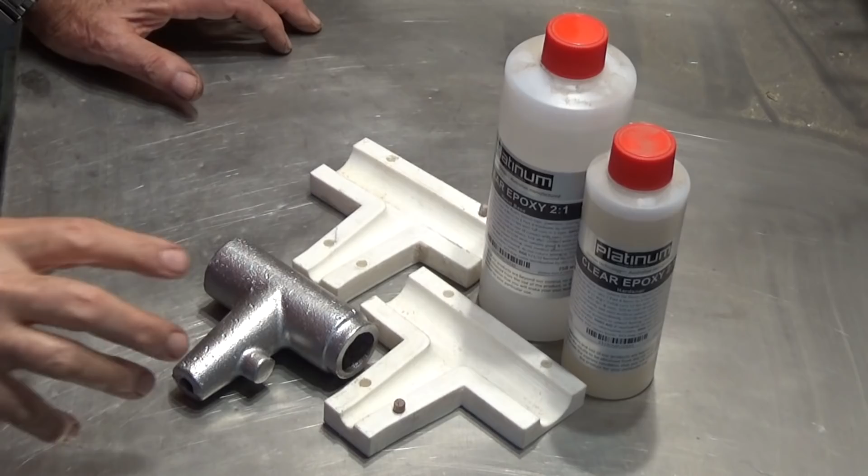G'day, it's Prezzo here, back in the shop, and today's video is about making a metering valve for a home shop blasting cabinet. You've probably seen lots of videos about the Harbor Freight Sandblaster or Media Blaster, and you've probably looked at all of the upgrades that they recommend you do after you buy one of these things. And it's a bit of an indictment on the manufacturer, really, that no sooner do you buy it than you need to do a whole bunch of remedial work to actually make it operate effectively.

Now, the one that I bought, I went through and did most of the upgrades. I improved the lighting, I sealed the lower section of the cabinet. What else did I do? I put a liner on the inside of the door so the media wouldn't fill up the little holes in the pockets in the door. I made a trolley or caster base so we can wheel it around the shop.

And to me, the most important upgrade was to make sure that I could get a continuous flow of, and I'm going to use garnet, but I need to get a continuous flow of garnet to the gun. Now, the device that they supply with the blast cabinet, you might as well throw it in the bin as soon as you get it. It's not effective, it doesn't work.

Now, there is an upgrade that you can purchase which includes a foot pedal and a thing called a metering valve. Now, I considered buying one of these, but unfortunately when you live in Australia, US manufacturers don't really want to ship to Australia. The cost, we pay 30% just on the value of our dollar for whatever it's worth, and then you've got the shipping charges and tax and everything else, and it just becomes impossible.

So what I considered doing was replicating the operation of this metering valve based on what I understand it's supposed to do. And essentially what you want to do is to take the media from the hopper, take it through a right angle bend here, and then at this point here we're going to add air to the mixture. And what that does is it fluidizes the flow of media so it will pass through the clear plastic tube to the actual blast gun more freely.

Now, in my last video I made this casting and I did it using a 3D printed core box, and I used an epoxy resin and sand mixture to make the core, and that was a resounding success. I ended up with a casting that's hollow all the way through, plus a tapered section inside here. So what I'm going to do today is to do all the machining on this and see if we can get it working. But before we do that, let's have a look at a diagram which I hope will explain how these metering valves operate.

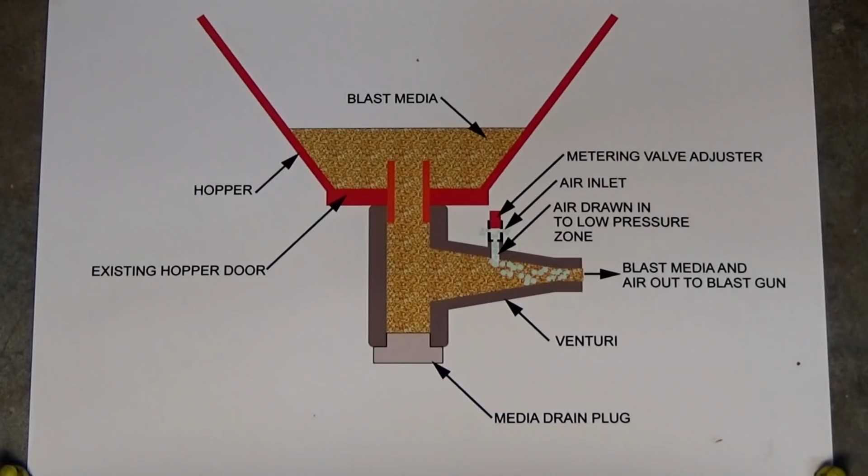Okay, well I could have done some fancy CGI animation, but I thought, hey, what the hell, let's do it old school. So this is a diagram which I hope explains how this metering valve works. Now, if you've got one of these Harbor Freight blast cabinets or a Hare and Forbes one, they're the same, you'll know that this is the bottom of the hopper. There's a flap at the bottom here which can be opened to drain the media out.

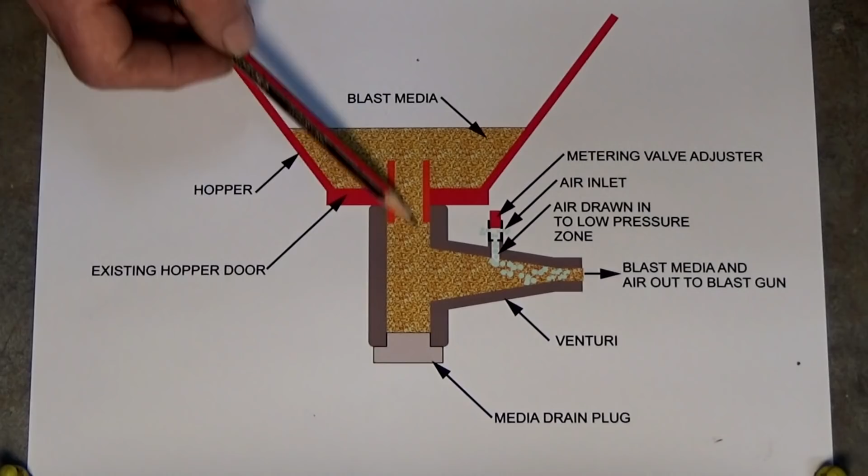Now, the modification that I've seen in kit form, and the one that I'm trying to replicate here, allows you to drill a hole in the bottom of that flap there, put a coupling in place, and this aluminium casting, which you've already seen, has a path going straight through and blocked off by a cap at this end. You can undo the cap and drain the media out of the hopper if you need to.

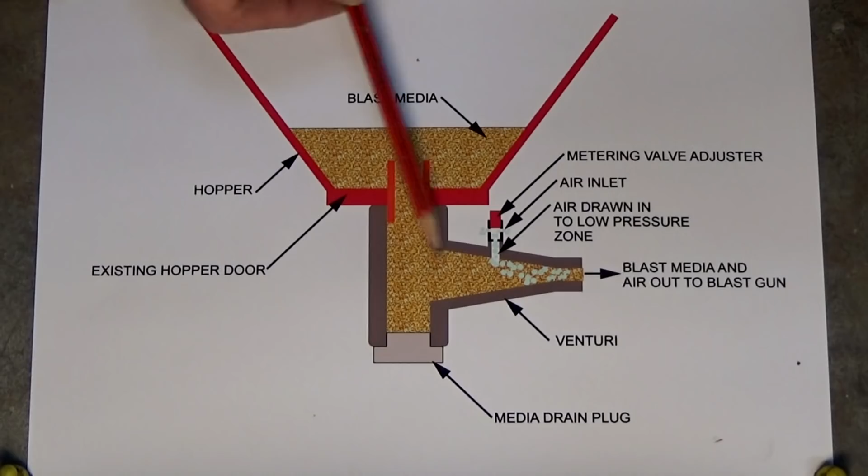Now, this section here, this tapered section, diverts the flow of the blast media to a coupling at this end, which is connected to a clear plastic tube. And it's tapered. Now, I'm guessing that the reason we're having this taper here is to create a venturi effect. Now, the sand itself, if it's not doing anything, if it's just sitting there, it's like a solid.

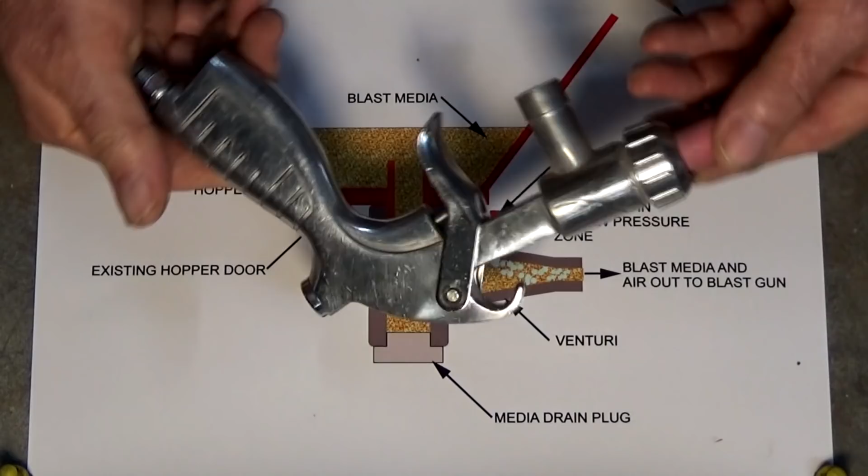But when it's starting to be drawn along by the vacuum created by this gun, it becomes like a fluid. Now, as any fluid passes through a venturi, its velocity increases. When the velocity increases, the pressure drops. Now, the pressure drop allows air to be drawn through this variable metering valve, and the air then mixes with the flow of the blast media. I'll call it sand because it's easier.

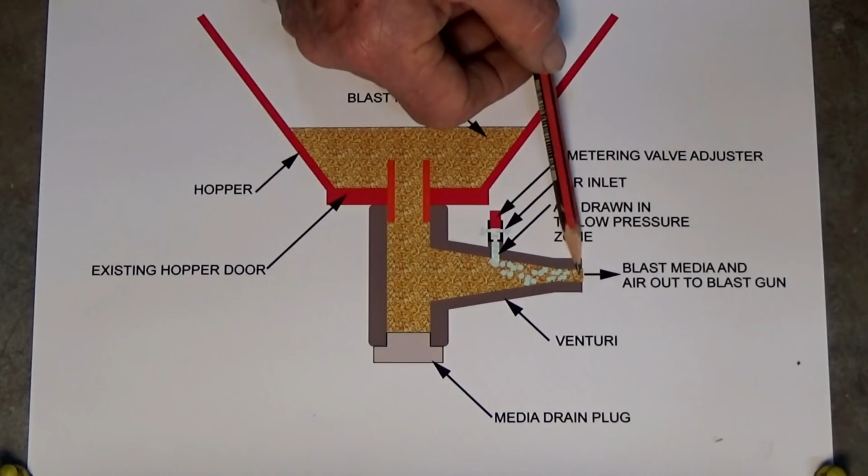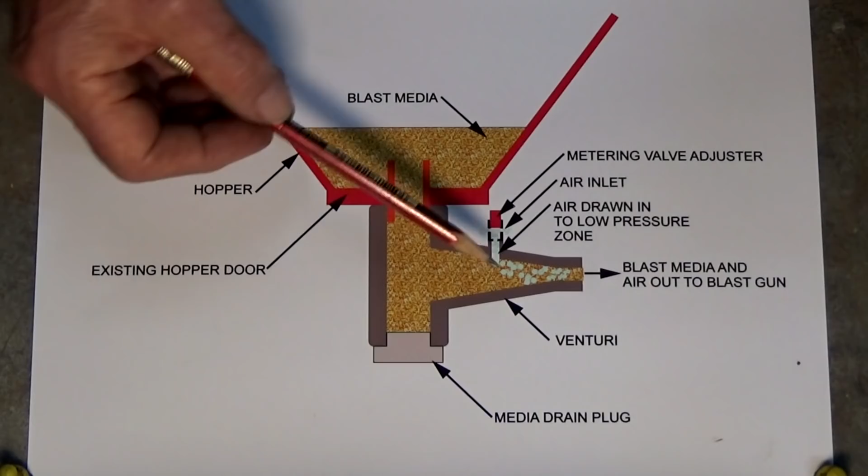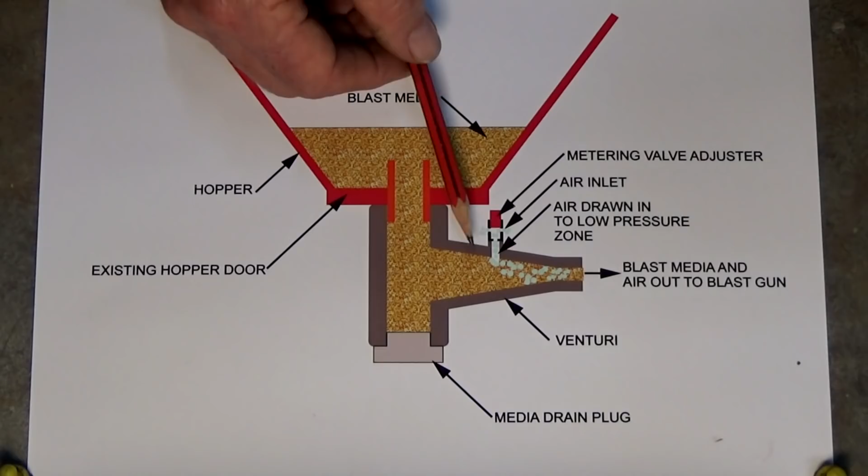So now we have a mixture of sand and air passing through the venturi, and because that has a lower density, it's mixed with air, the theory is it's easier to be drawn up by the hose and into the blast gun itself. Now, all of this is based purely on speculation and my very, very limited knowledge of fluid dynamics, and also from me studying a few fairly low resolution images. Now, if I've got it wrong, feel free to shoot me down in the comments section, but that's my take on what's happening here.

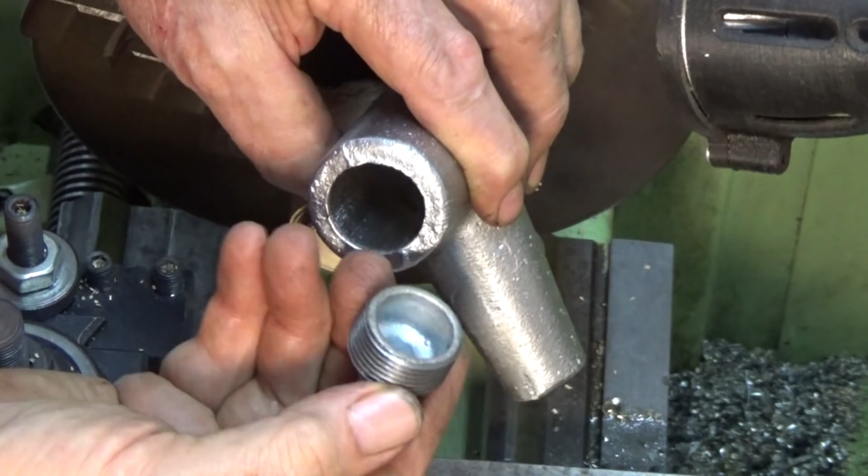So I'm going to go ahead and make this and fit it to the cabinet and see if it works. One of the first things I have to do here is to make a plug to go in this end here. This will be where the media is drained out if you want to change over what's inside the sandblaster. Now, I went down to the hardware store and I bought one of these little threaded plugs thinking that would be ideal. Turns out that this is 24.5 millimeters diameter. The drill size for this is not going to work, so that's scrap. So I'll need to make a plug from scratch.

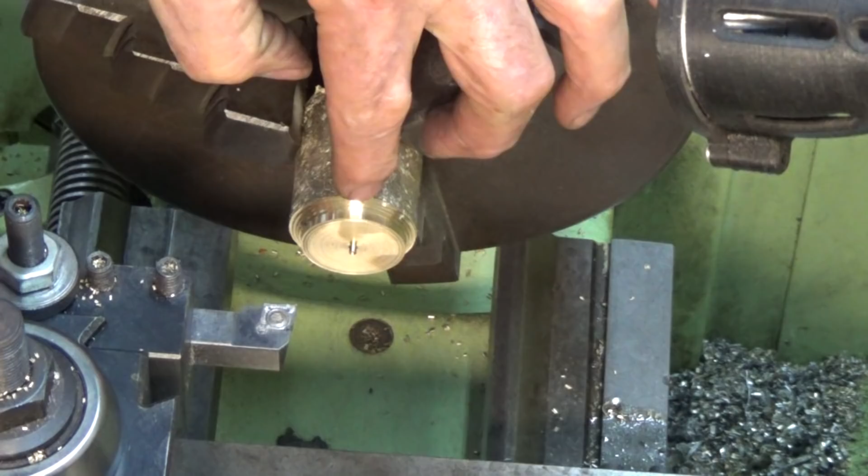Now I've got some brass here which was left over from a casting job that I did, and surprisingly this machines beautifully. So we're going to cut a thread, a male thread on this. It's going to be 1-1/8" UNC. I think it's 7 threads per inch. I don't work in imperial, so I've got to write all this stuff down. So it's 1-1/8" UNC, 7 TPI, needs a 25 diameter drill size, which is going to be ideal for here. That's 24.5, so I'll just be able to clean that up and cut a thread in there. So we'll do this section first, and I'm going to make a Tommy bar through here so it's easy to grip and undo that.

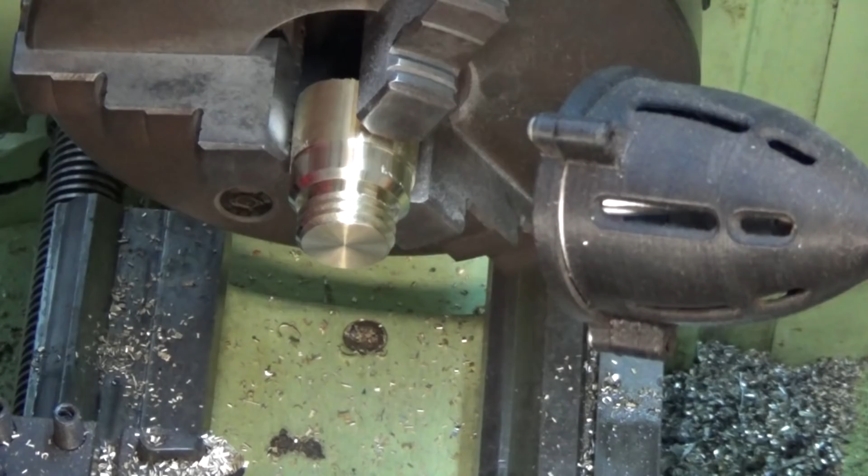Alright, so what did I say? 7 TPI. That'll be alright. I'm going to change over my driver gear. I just barely see that scratch, so I'm just going to check that. Okay, I think I just did all of that threading and forgot to turn the camera on. But there it is there. That was a 7 TPI thread.

The reason I did such a coarse thread was that when you unload the funnel or the hopper inside the blast cabinet, all the media is going to come out through this thread section. And if you've got a really fine thread and you try and put the plug back in there, it's likely that it's going to get jammed up and score the thread. So at least with this big coarse thread we can sort of blow it out a bit and get it cleaned out fairly easily. Now I've just re-chamfered the 2 corners there, and I'll put this back in the chuck later and I'll drill a cross hole for a Tommy bar.

I want to get the female thread cut in the aluminium casting and make sure that's all good before I go much further. So that's where my threaded plug needs to go, and the challenge now is to get this cleaned up on the end here and then cut the internal thread, and that's going to mean cutting a thread clearance inside. So I'm just going to get this cleaned up here. That's running out a bit more than I'd like, really. Let me see if I can get this running a bit more true. Okay, so what we need to do now is get that bore out to 25.

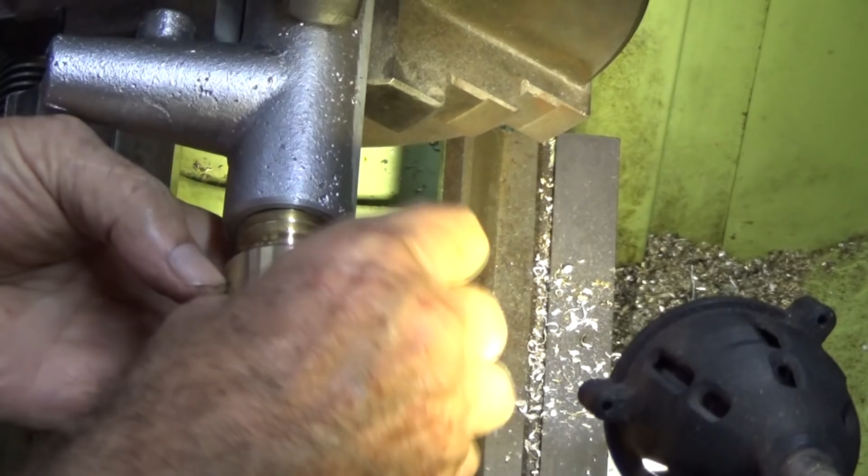I'm not having a good day, and my memory card filled up, so I missed the critical moment where I was about to show you how good this thread is. But I finished off using some cutting fluid just to give me a better finish on the internal thread, and you might say that's a bit wobbly, but I want to have some clearance there. I'm going to have a rubber washer for this to seal against, and that screws in there. Because it's such a coarse thread, I'm not bothered that it's a little bit wobbly to start with. It's going to make it easy to get in. And remember, this is going to fill up with grit, so that's okay.

So what we're going to do now is flip this around. We're going to cut a thread on the other end, and that will be the one that secures against the door in the bottom of the hopper. This is the end that's going to fit into the bottom of the hopper door.

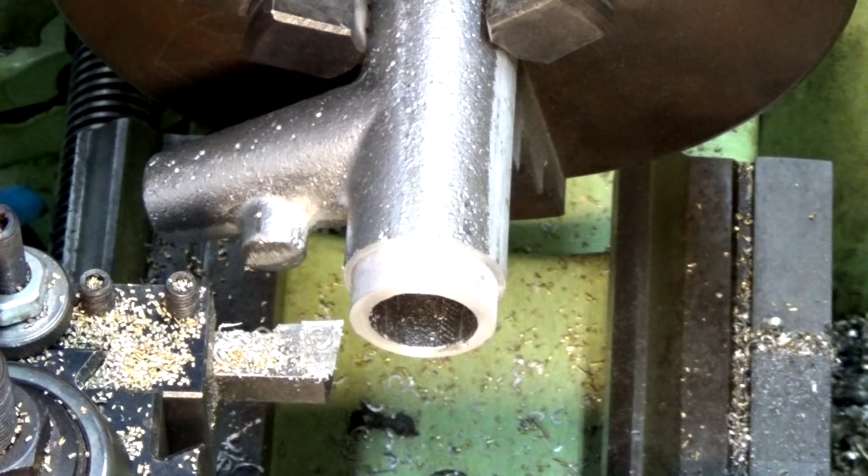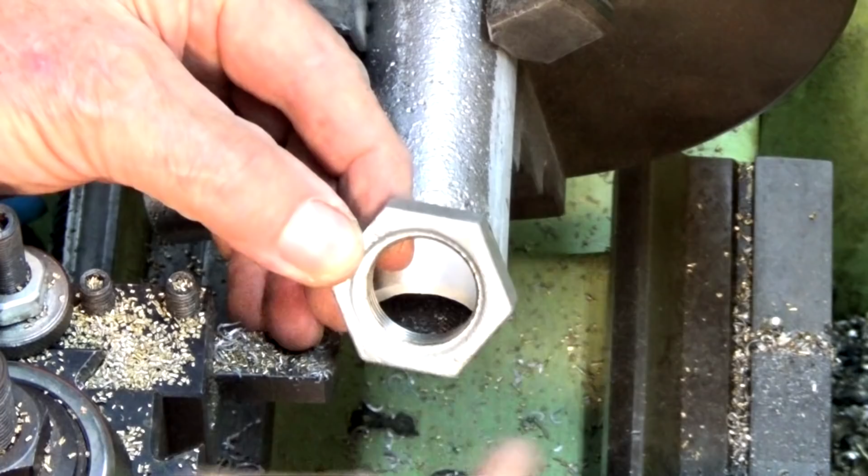So I need to cut a thread on this, and even though I normally work in metric for my North American friends, I'm going to make an exception. So I'm going to cut a 1.25 inch UNF thread, 12 TPI, and I've discovered that I can just get that same thread inside this hex nut, but I'll need to bore it out and re-thread that. So this is a one-time only thread. It's going to be done up tight on the bottom of the hopper door, and it's not going to move again after that, so I'm not too bothered about this being a finer thread.

Just to save time, I already partly machined this just to get it cleaned up. So 2.22 millimeters, or 87 thou, off that.

Right, so I'm going to put some thread relief there.

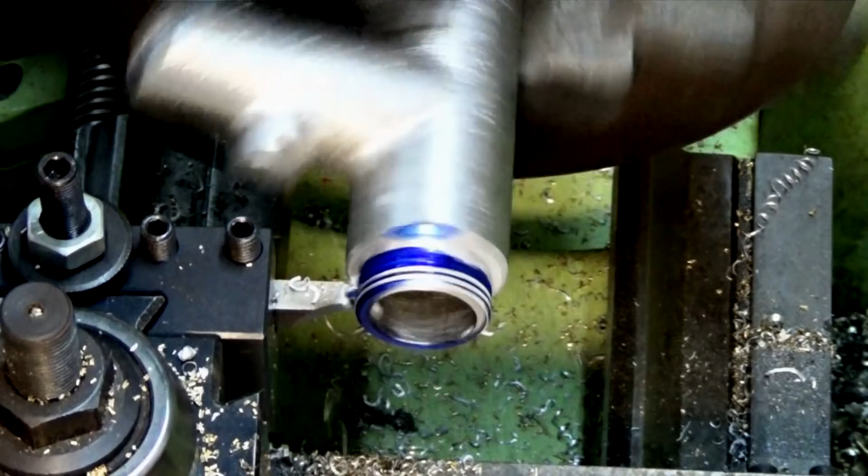Nearly there. I don't know if you noticed, but I didn't withdraw the tool enough when I brought it back. I left a little scratch mark on the way back. Sign of a rank amateur.

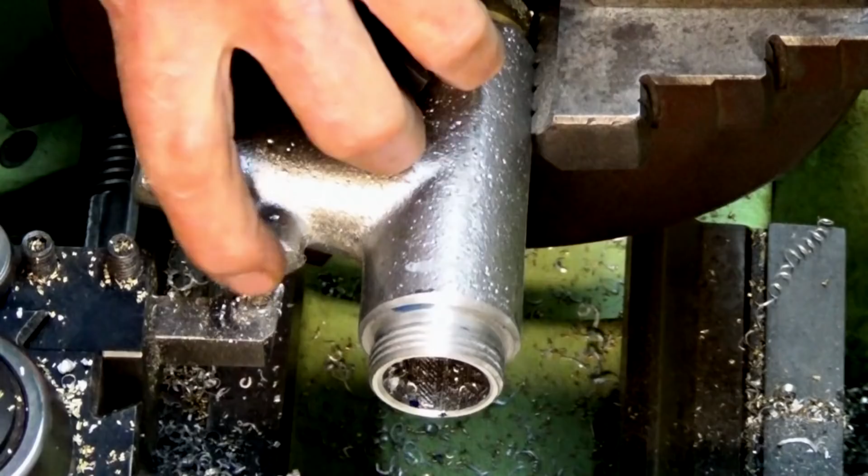That's about as far as I want to take that. So I'm going to machine this boss here now, and when you're doing a setup like this, I always like to turn the spindle over by hand just to double check you're not going to have anything clash and break or smash. I don't know how many times I've turned a lathe on with an odd setup like this and overlooked something, like maybe the compound slide's extending too far underneath the part. You just don't expect it to clash, and it does. So I'm going to give this a light cut now.

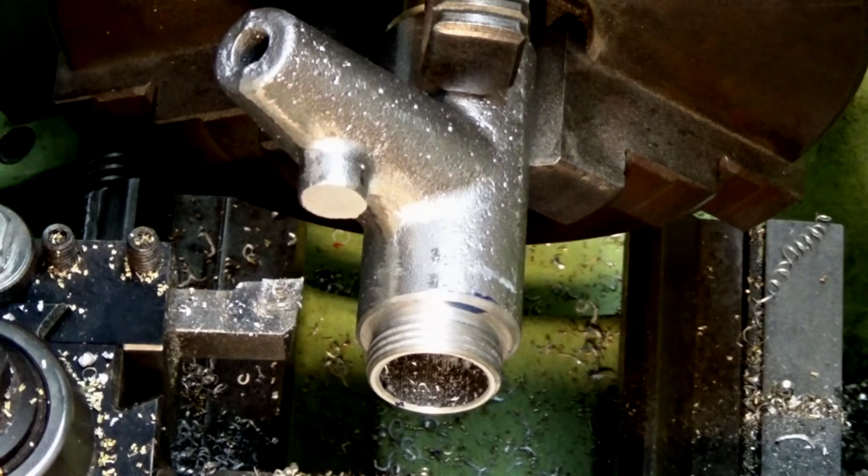Let's mostly clean that up. Let's give it one more pass.

Alright, so I can drill this in the lathe, and it's just convenient for me to do it that way. So I'll get this laid out, just find a rough center. I suppose the good thing about this is none of these dimensions are really critical. I mean, the threads are, but other dimensions we can get away with a little bit of error. It's not a problem.

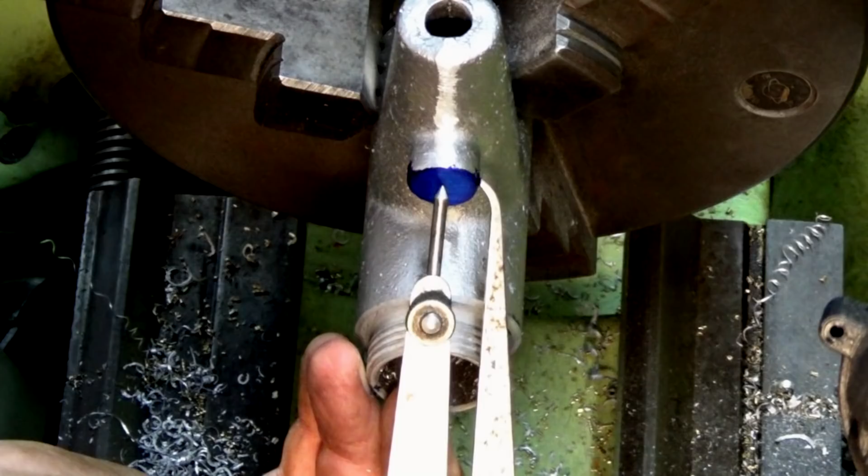Pretty hard to see there, but what you end up doing with a pair of these Jenny calipers is you estimate the center, scribe a line from one edge, flip it over, scribe it again, and if there's an error you just split the difference and that gives you the center. So I'm fairly confident I got that right.

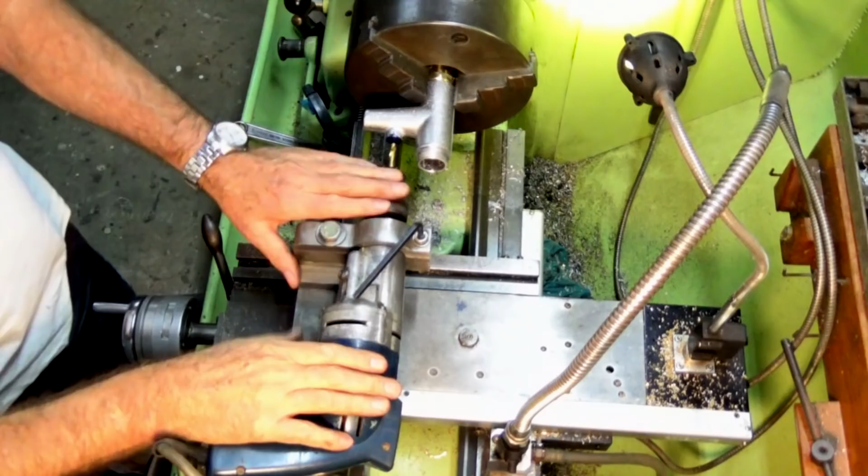So we're going to set up now my drilling jig and we'll drill that through. This is my rig for doing this drilling operation.

This is a really old AEG 2-speed drill with a metal gearbox, and I've seen some devices being used by home machinists that generally rely on a cordless drill with a spindle bearing through here. If you can get one of these old drills, they're rugged and robust and rigid because they have the metal gearbox, and this is just a split clamp which has been machined out at the same height as my lathe spindle, and it just clamps down with a single Allen screw there.

So let's go ahead and get this spot drilled and then we'll open it up. I'm going to put a 10mm metric thread in there. I know, mixing imperial and metric threads, I'm a rebel.

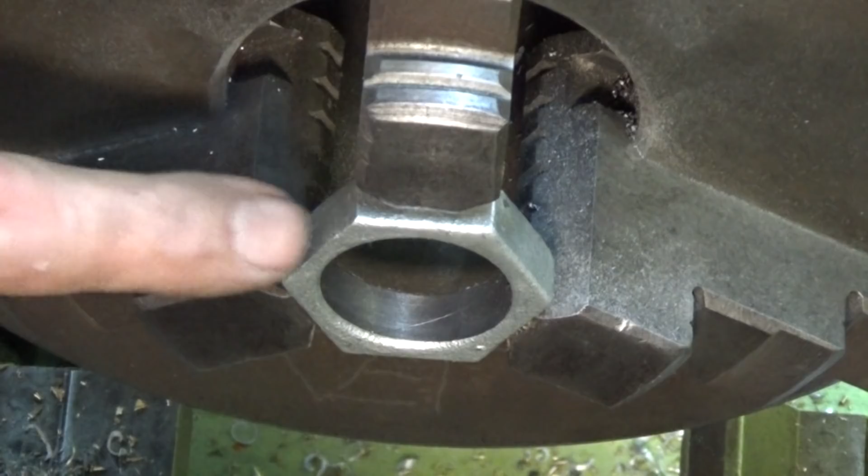Okay, that's close enough. That's going to be my 1¼ UNF nut, and we're going to cut a 12 TPI thread on the inside of that.

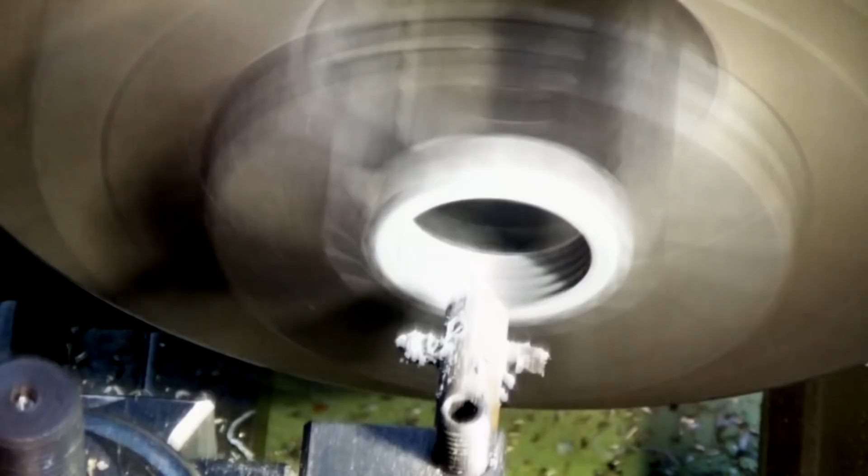That's a long way off being done, but I always second guess myself.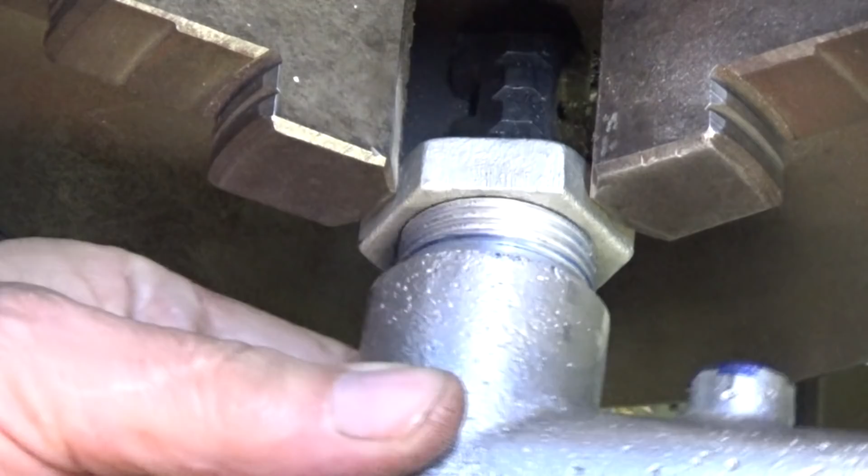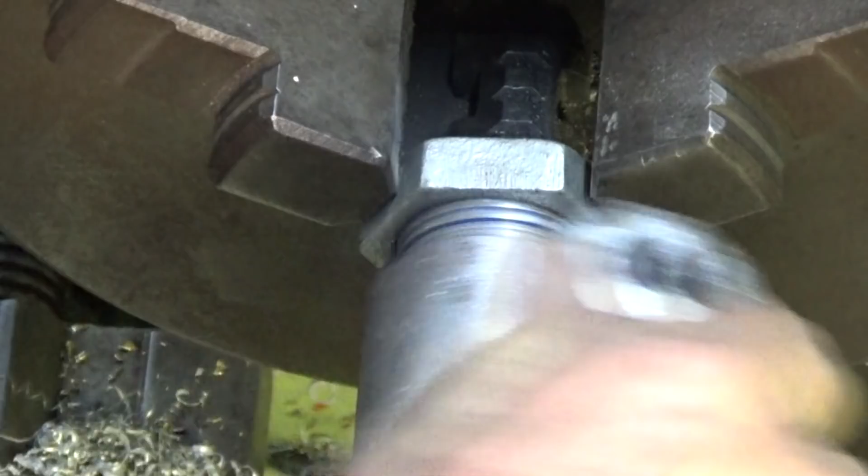Oh, look at that. That sloppy mark, come on. Ah, it'll work. Good thing I checked that, eh?

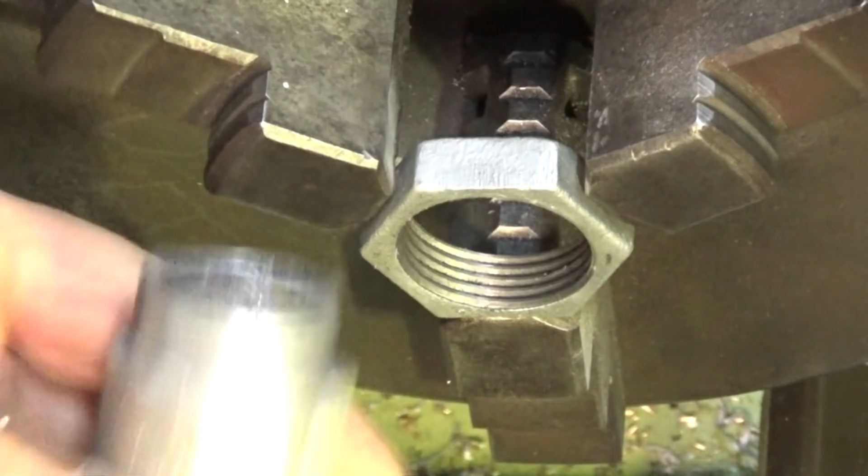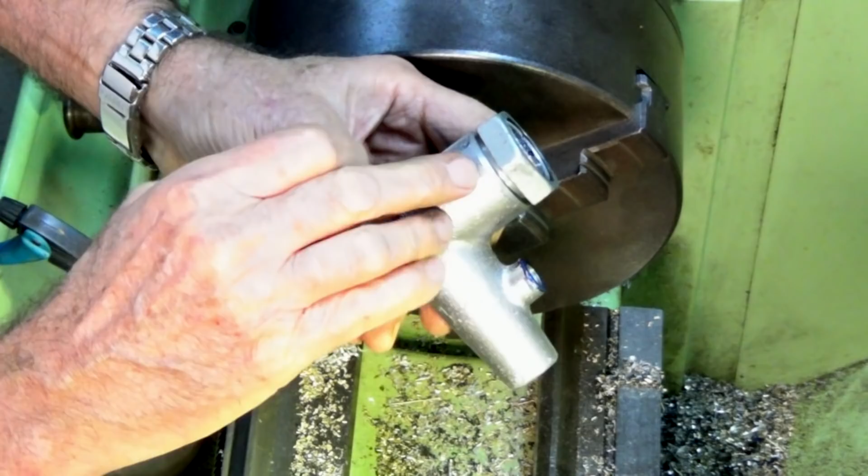Hope Stefan's not watching. Alright, well that's slightly embarrassing, but there's going to be a rubber washer in this junction here, and that's going to allow it to seal against that door, and it's only got to get done up once, so I think I can get away with that.

So we're pretty much done. I've continued that thread all the way through into the bore. This part's done. We've just got to make the thread and the fitting here, and make the most important part, which is the air bleed valve. Now I've got some stainless steel hex for doing that, and it's just got to have some ports in it and an adjustment screw, and that's it. So we're getting close.

Be nice if that chip breaker did its job. I know I'm running that too slow. Let's try that.

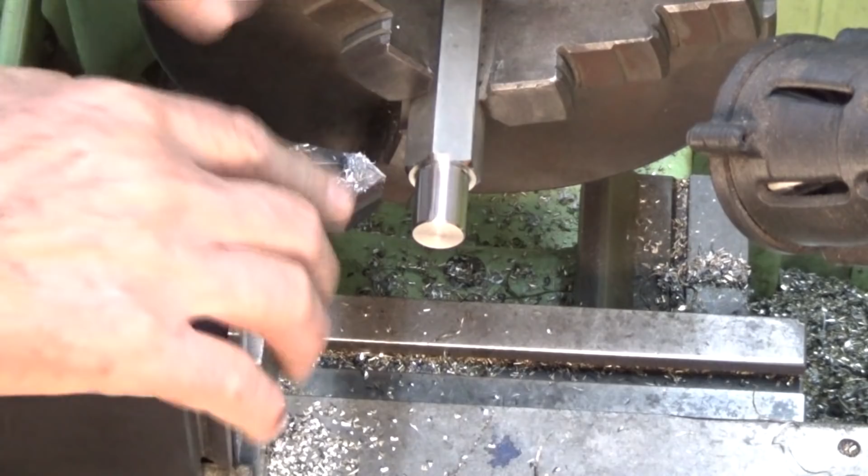Okay, now I'm not sticking to any particular dimensions here. This has got a very simple function: it's just to allow a measured amount of air into the port. So if the commercially made ones are any guide, there are just a pair of holes drilled through across the center line or the center bore, and a threaded plug is wound down into that, so you can uncover one or both ports and vary the amount of opening.

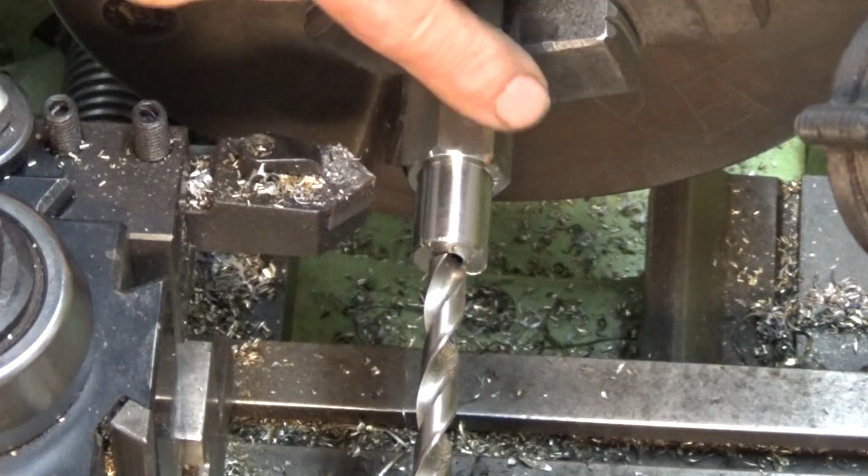Okay, this is a letter drill, letter R. It's the closest thing I've got to an 8.75mm drill bit. And we're going to tap this M10 by 1.25, so it's a metric fine thread. It's just so that we get a little bit more fine adjustment on this. Probably not necessary.

Alright, so I've taken that hole for the thread right down to that shoulder there. When I drill my two cross holes, I'll be able to block off both holes completely with the adjustment screw. And I'm just shooting in the dark here, I'm not sure what sizes these are meant to be. I guess we'll just fine tune it as we go.

It's not to depth, but I'll finish it off with a proper tap wrench later.

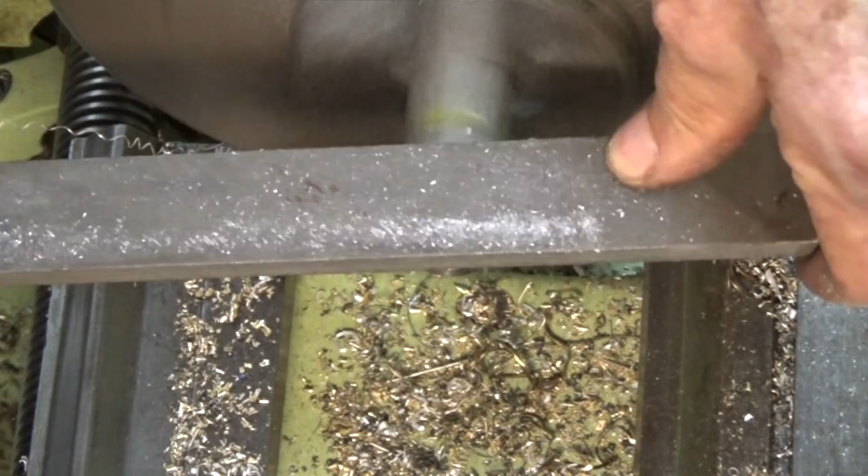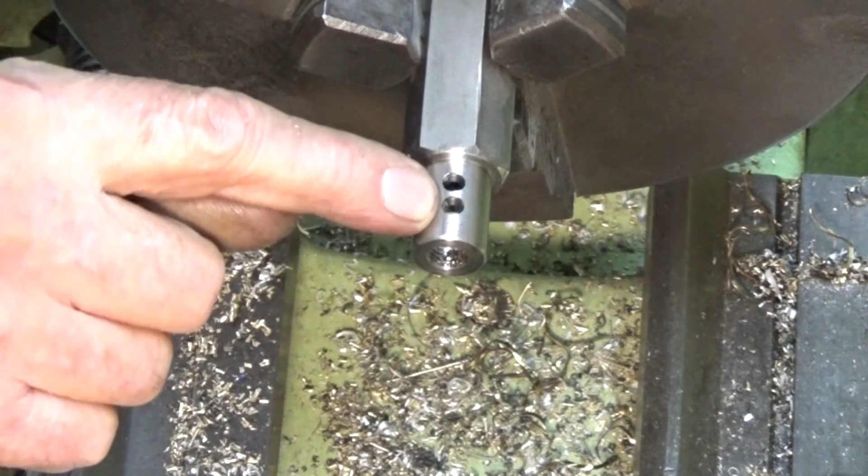Okay, well there are my two air inlets, and I'll need to make a threaded plug with some sort of a knurled knob on the end of that for the fine adjustment. And we'll get a thread on here and we're getting close.

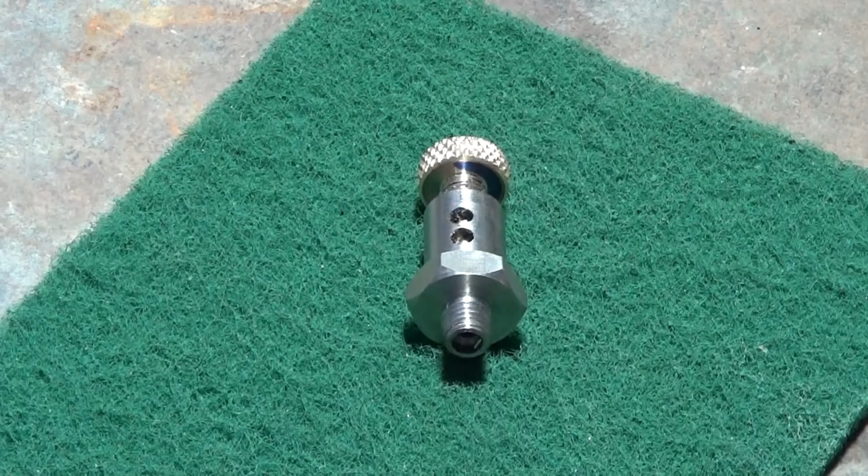Well, this is the finished metering valve, and although if you check these out on eBay or on the website, you'll see that the whole aluminium casting and this device here are called a metering valve. In reality, I believe that the aluminium casting you've already seen is just a way of attaching this device and letting it join the stream of media that goes from the hopper to the blast gun. When I first saw this, I was expecting it to be some complicated piece of engineering with ball valves or reed valves or something. But now I believe that this is all it is basically: just a brass threaded plunger which progressively uncovers this pair of holes here.

Now to make the plunger, it was just some scrap brass. I put an M12 by 1.25mm thread on this end, and I put a diamond knurl on this top part here. And I believe that unless you swap out the media and use a finer or coarser grit, you're really going to adjust this once, and then after that you're not going to touch it.

Now I've just set up the aluminium casting for doing the last machining operation on that. I'm going to use my CNC mill for that procedure. And sadly I'm going to have to finish this video here now because it's sort of gone over my self-imposed limit of half an hour for a video.